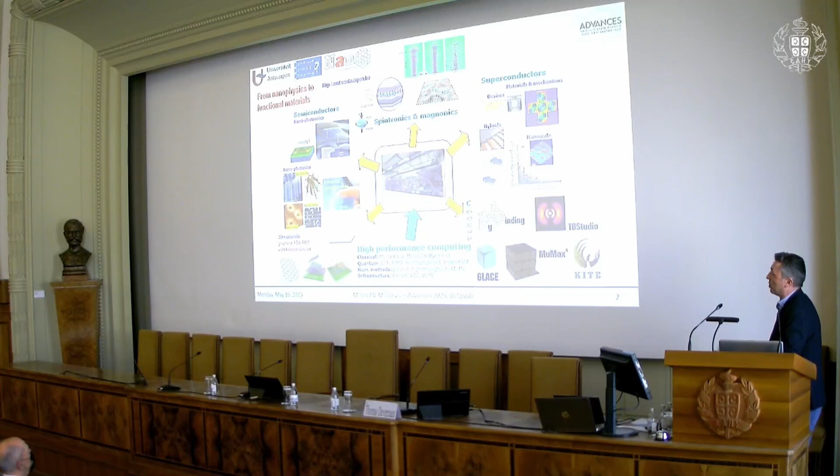Multi-scale theoretical modeling is a common denominator, whether for bulk materials, hybrid heterostructures, two-dimensional materials, and so on. Also common is high-performance computing—we develop codes and algorithms for addressing these challenging problems in material science, most of which are available to the scientific community.

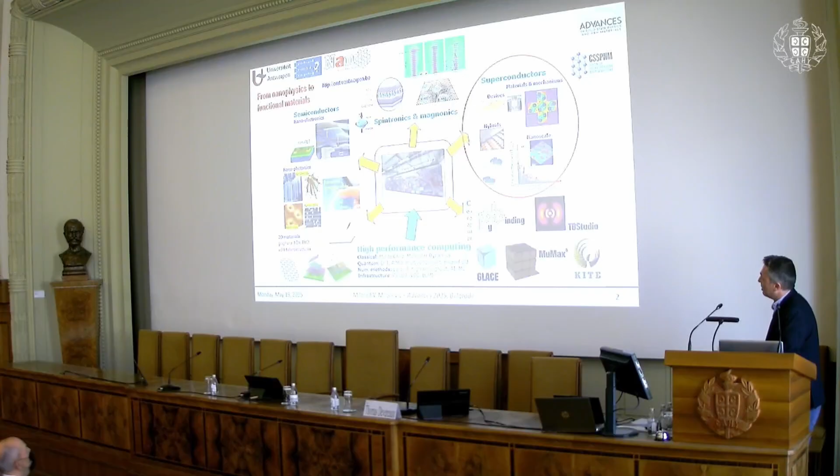Today I will talk about superconductivity, because that's where we had the most interaction with the center in Belgrade. Superconductivity for us is a long-standing topic, about 20 years, but we started from fluxonics and devices based on vortex matter, understanding their behavior in applied magnetic field and applied current.

We extended that to three-dimensional architectures, type 1 superconductors—most elemental superconductors being type 1—where the challenge is to correctly calculate and address the long-range magnetic fields coming out of the superconductor. Then Josephson physics: the Josephson junctions and Josephson phenomena between superconductors using various models.

Going to the nanoscale, below the characteristic length scales of superconductivity, when we confine electrons and Cooper pairs truly at the nanoscale, what are the emergent phenomena there?

Unconventional hybrids, not unconventional superconductivity—superconductor ferromagnet hybrids, antagonistic phenomena in solid-state physics, or graphene-based and 2D materials-based junctions. Semiconductor superconductor hybrids relevant to Majorana physics and, for example, the Microsoft path chosen for qubits. And finally, atomistic simulations, meaning the origins of superconductivity at the atomistic scale.

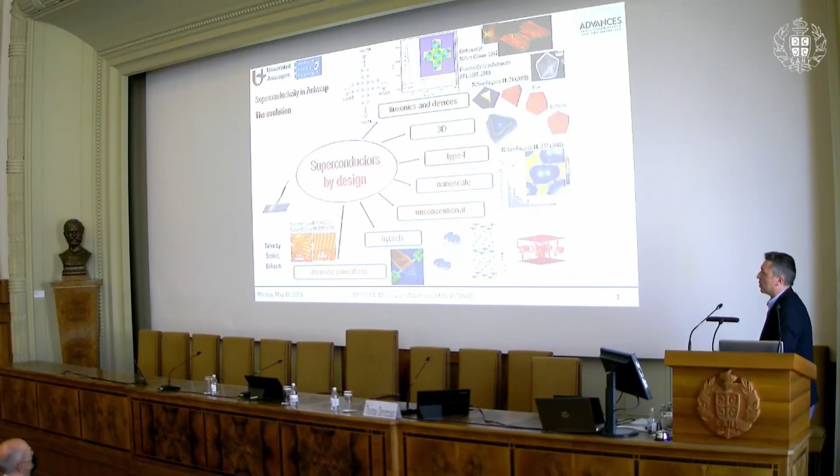I chose a topic that should be interesting and entertaining to most of you. Why is superconducting electronics interesting? Well, for one, it's low dissipation—that's clear from the superconducting properties. But it's also low noise, low loss, extremely nonlinear, high resolution, very high sensitivity type of electronics.

What is the drawback? It's the cooling, obviously, that one has to do to reach the superconducting state. But everything else is a plus.

So one commercial device that is widely available is a superconducting single photon detector. It's nothing else but a superconducting wire that is meandering and covering as much space as possible—this is about 10 micron by 10 micron.

If we measure the current voltage characteristics, we are in the superconducting state below the critical current: 0 voltage, 0 resistance. If we operate our nanowire just below the critical current, when a photon impacts any part of the nanowire, it will locally suppress superconductivity, and we will have some resistance—this is what we call a resistive state.

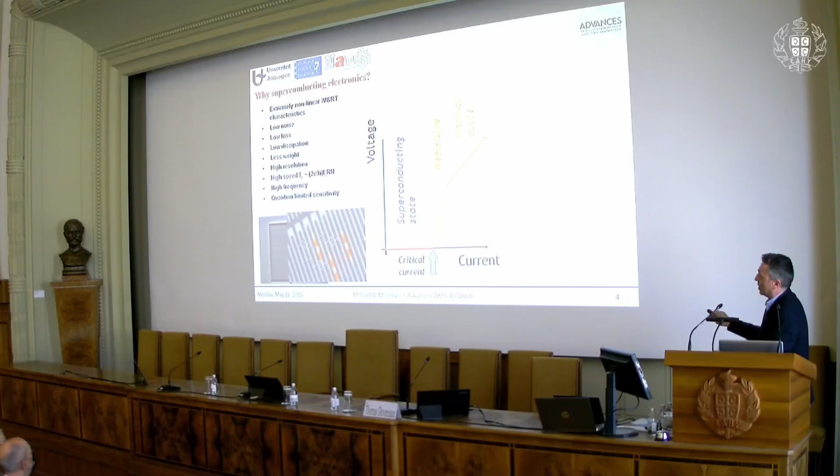If you keep pushing the current up, you reach the normal state. But we are going to have an onset of a voltage pulse, and if we then shunt this nanowire single photon detector with another resistor, with resistance lower than that of the resistive state, the current will go that way, superconductivity will recover, and our detector will be ready to detect the next incoming photon. That's the basic idea.

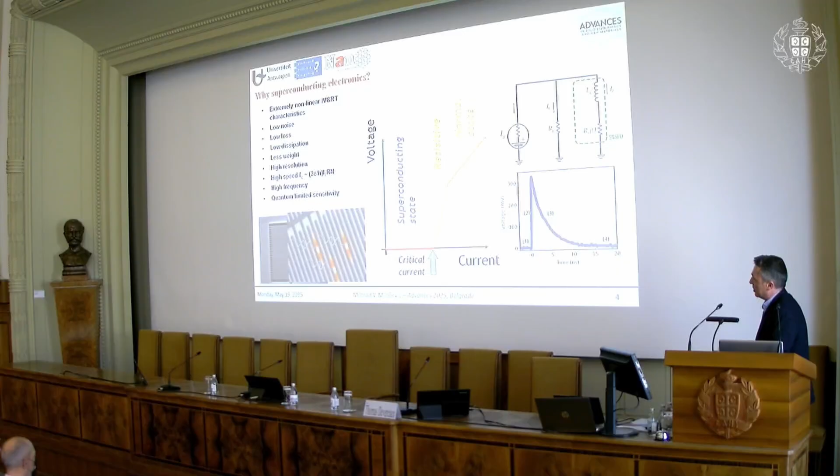I show this because I will need it a little bit later for the other devices I'll be discussing. Next to this, which is fully commercially available, there are also SQUID detectors, magnetoencephalography.

Any better equipped hospital will have this scan of the magnetic field of your brain based on SQUIDs and Josephson junctions. Josephson junctions are the base of a large set of electronics that's readily available, like this random access memory from the Lincoln Lab at MIT with a record-breaking 4 million Josephson junctions per square centimeter, actually based on 3D electronics, on multi-layer niobium structures. Josephson junctions are realized here by proximity of the two layers.

Or superconducting diodes that are up and coming. I will not spend too much time on that because I'm sure Mazhar Ali will discuss that a few days from now. But the idea is that you break the inversion symmetry of your superconductor one way or another, so that for one polarity of the applied current you have superconducting state, but for the opposite polarity you have normal state resistance. So in one case you have no resistance, in the other case you have maximal normal state resistance. These are things that are very well developed.

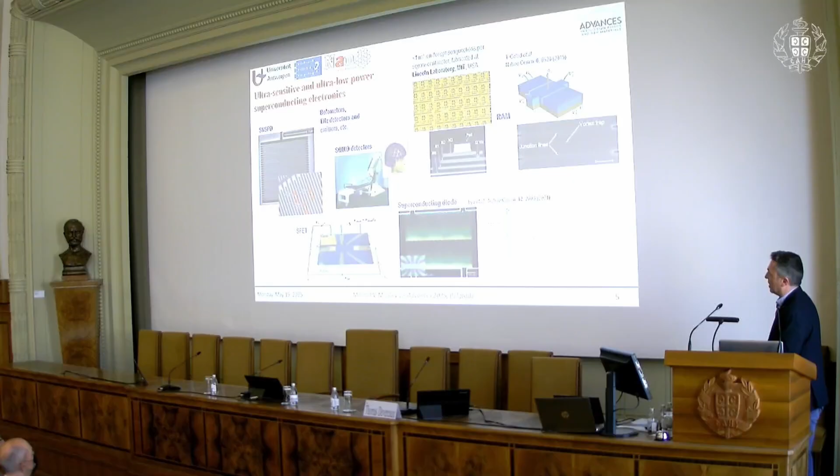Also, why is this interesting? Because of the second quantum revolution, qubits, all qubits that we hear about these days by big companies, IBM, Microsoft, Google, are based on superconductors one way or another. Why is that? Because we are able to fabricate superconductors with high chip density and control or read out both input and output in more ways than one. So these are not the best qubits in terms of coherence or other properties, but are best for technology. That's why there is heavy investment in superconducting electronics as well.

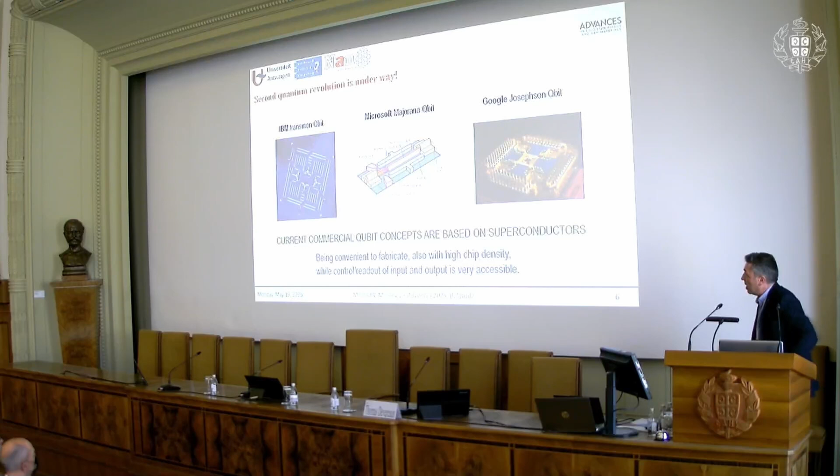So last but not least, I want to draw your attention to the rise of energy demand. Computing, data processing, machine learning, and artificial intelligence, ChatGPT, the clusters and servers of Google and Microsoft are eating up enormous amounts of energy, and individually they consume more energy than half of the countries in the world, more than 100 countries. Serbia is a bit higher on the list, but nevertheless consumes less annually than Google and Microsoft together. So there is a need for superconducting electronics. It's more appealing than ever. The cost of cooling is nothing compared to the gain for these computations at the exascale.

Superconducting single photon detectors we have, superconducting diodes we understand. I will not spend time on those, but I will talk a bit about superconducting field effect transistors and artificial neural networks as the next step.

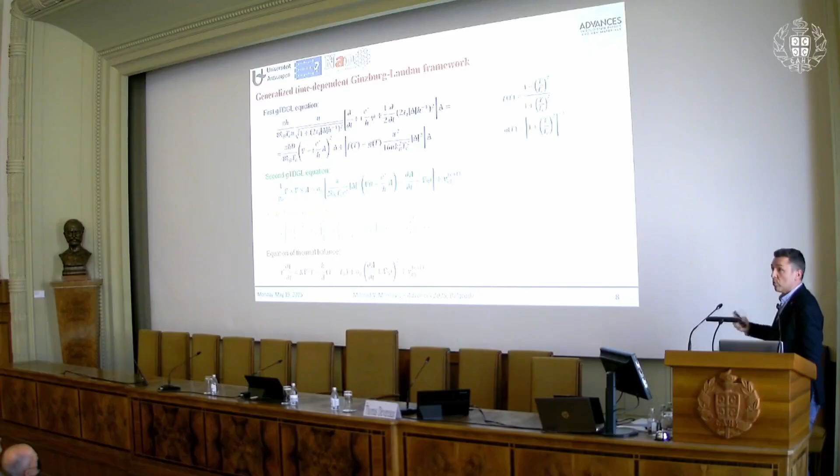These temperature dependencies here, Ginzburg-Landau theory is derived very close to the critical temperature. Strictly speaking, it is valid only at the critical temperature, but in comparison to experiment and following some empirical expressions proposed by Ginzburg many years ago, this actually is proven to work at very low temperatures, far from TC.

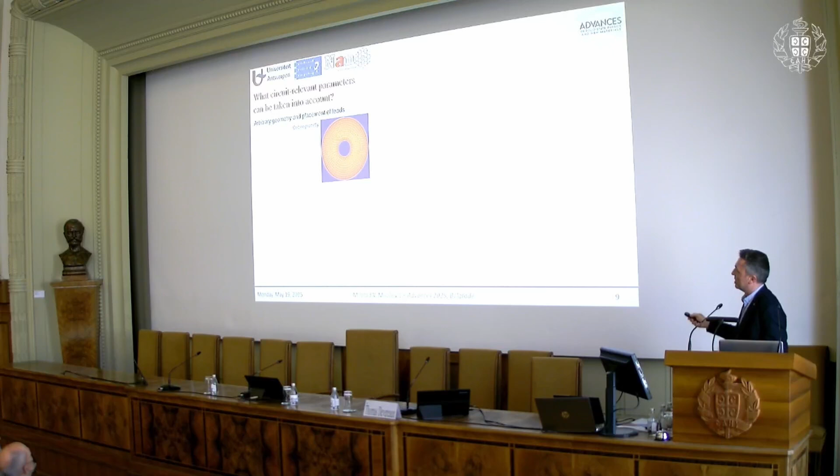In these simulations, we can take arbitrary geometry of the circuit. We can place leads. This is a Corbino geometry, so I'm putting current in here, taking current out there, and I'm monitoring how vortices are moving. You see that works, and that the vortex velocity changes radially as the current changes radially.

We can model single photon detectors. Here, for example, at Karlsruhe Institute of Technology, they were wondering about the effect of edge quality of nanowires on the performance of these single photon detectors.

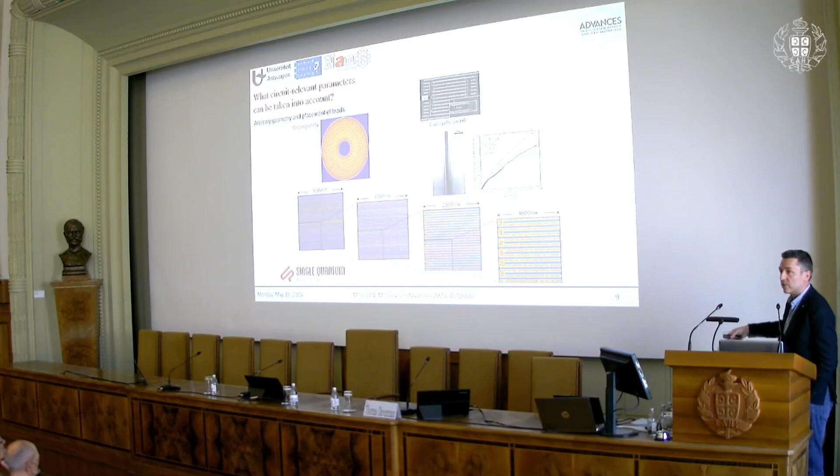So we did that, and we are able to do that at large scale. This is a commercial scale example from the single quantum company in Delft: an 8 micron by 8 micron single photon meandering nanowire that I just showed. We can do that with a resolution of 1 nanometer spatial resolution. So it's all working fine now.

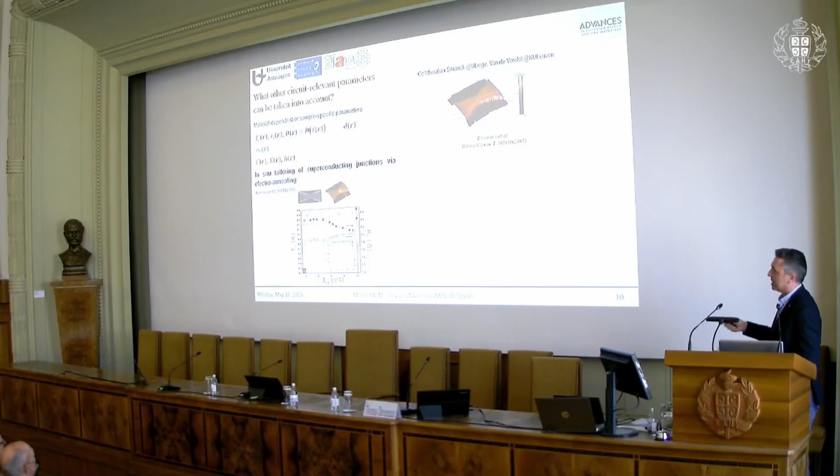We can also put spatially dependent parameters, be it inelastic scattering, mean free path, the heat balance equation, normal state conductivity, thickness—all of that can be done with 1 nanometer resolution. This was proven in previous papers.

So we take from experiment directly the shape and all the properties that experiment can give us. For example, here TC was varying from one place to another, mean free path was varying from one place to another, and we put that into the simulation without any fitting parameters.

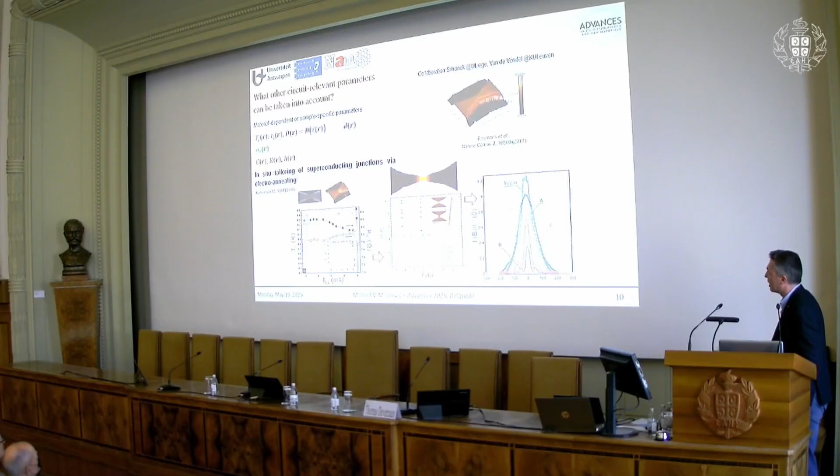And it seems to work. Okay, so now I'm coming to the base of all the technology that I'm going to talk about: a plain superconducting stripe. It's as simple as it can be.

So we have a superconducting nanowire. This is a typical 4-probe measurement: current is applied here, and voltage is measured here. What do you get then? You get exactly this type of current-voltage characteristic: superconducting state up to some critical current, then a resistive state, and then normal state. This is ohmic resistance right here.

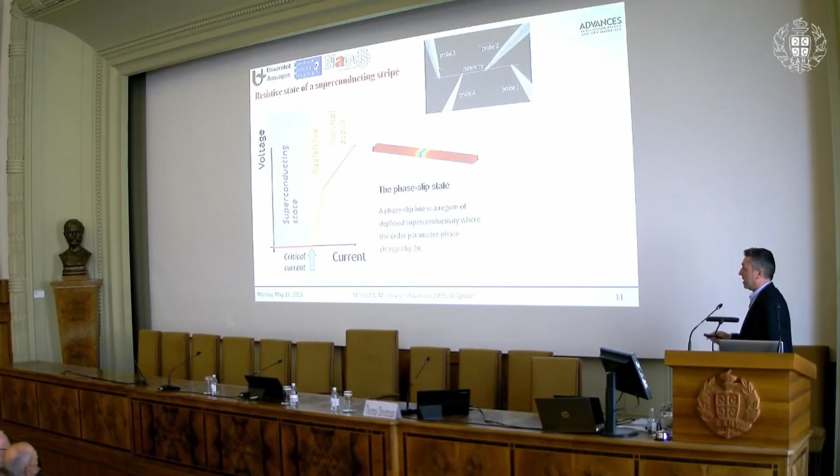So what is this resistive state? There are two possibilities. One is a so-called phase slip, meaning there will be a thin region, about a coherence length wide, of suppressed superconductivity, where the phase of the order parameter from one side to the other changes by 2 pi. That's why it's called a phase slip.

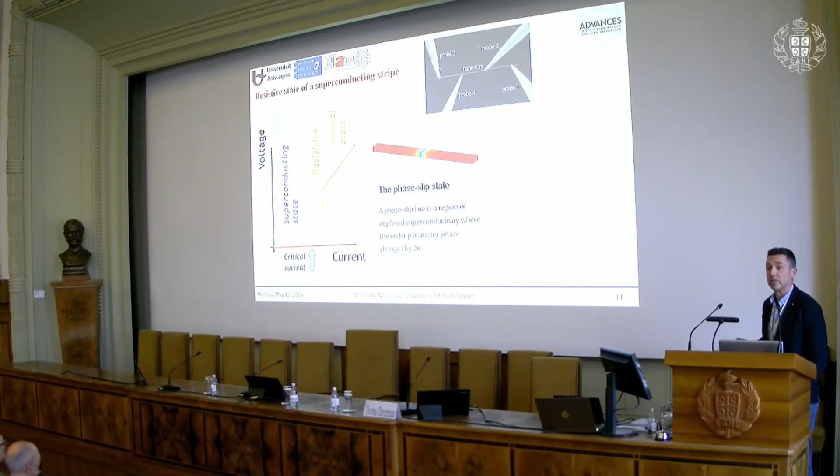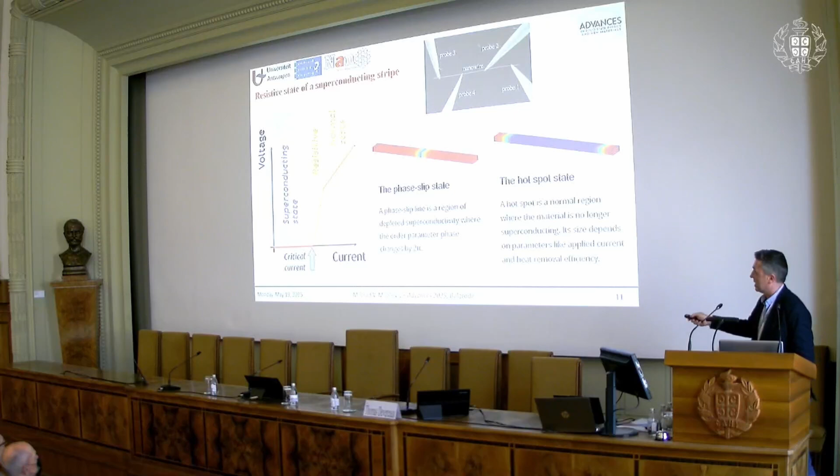Another possibility is the hotspot state. It's a similar dynamic, but this normal state heats up the superconductor, and we get a larger region where superconductivity is destroyed. From resistivity alone you cannot tell which one it is, but from the dependence of resistivity on temperature, you can experimentally determine which one you have. These are the resistive states I'll be talking about in the rest of my talk.

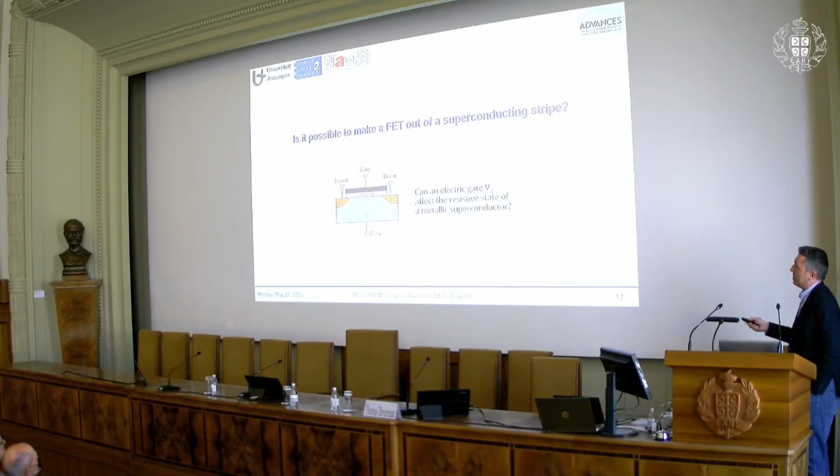And that's all. So now, field effect transistors—is it possible? It's the base of electronics, right? Can we have a superconducting field effect transistor with minimal dissipation? In order to have that, we need the effect of a gate on the resistive state of a metallic superconductor. As a physicist, you'd imagine this is not possible due to screening, right?

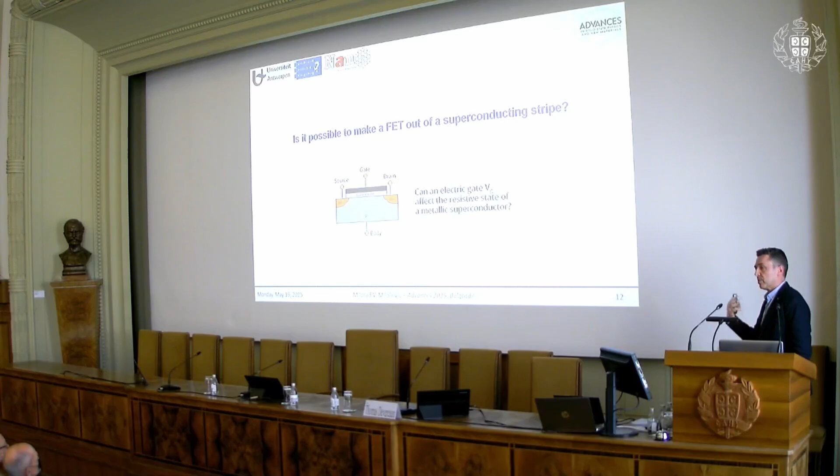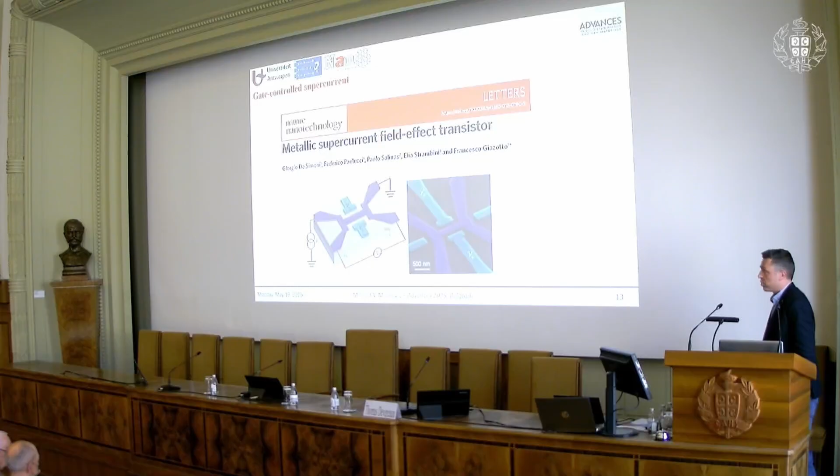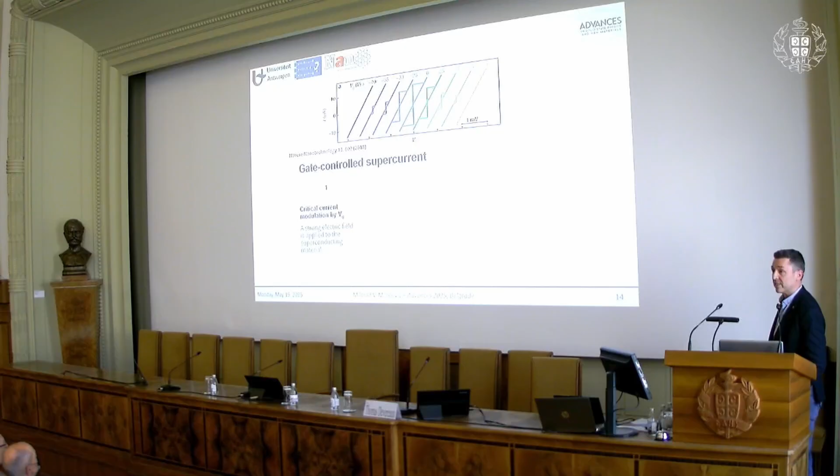So let's see. A couple of years ago, there was an experiment with a superconducting wire made of aluminum and titanium, gated from the side. This was about a couple hundred nanometers wide—you see it here, 300 nanometers wide—and the gating was applied from the side. Intuition tells us that nothing should change in the superconductor. However, they measured IV characteristics and saw that they depend on the applied gate voltage, shown right here. So there is a strong effect of a gate on a superconductor, in fact.

It is temperature dependent, so this is the critical current, the onset of resistance, as a function of gate voltage, and you see it is temperature dependent. There's a flat region up to which there is no effect of the gate, and then beyond some critical gate voltage, there is suppression of the critical current. It's a bipolar effect, perfectly symmetric with respect to positive and negative gating.

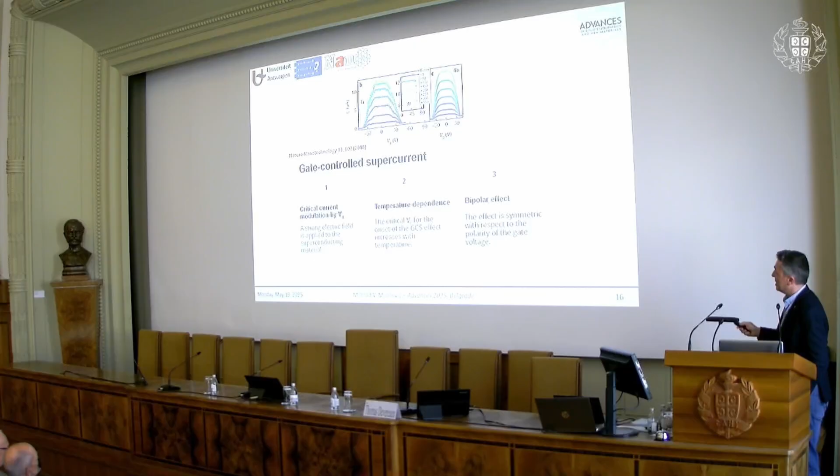But there is a problem: these gate voltages are very large, on the order of tens of volts. Why is that a problem? Because in order to integrate this with existing CMOS electronics, we have to get these gate voltages below 5 volts.

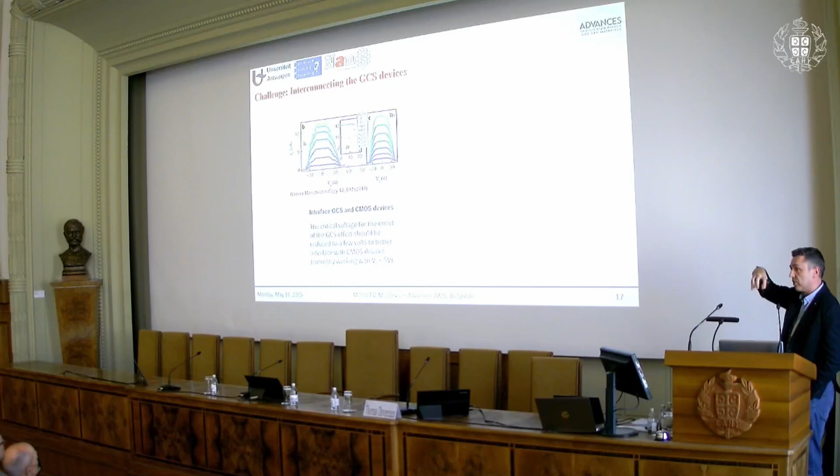But more importantly, we need to be able to connect transistors in series. For synchronization, we need to use the output voltage of one transistor as the gate voltage of the other. That is far away from what we need, because the input voltage is, let's say, 30 to 40 volts, while the output voltage is on the millivolt scale. So we are far off.

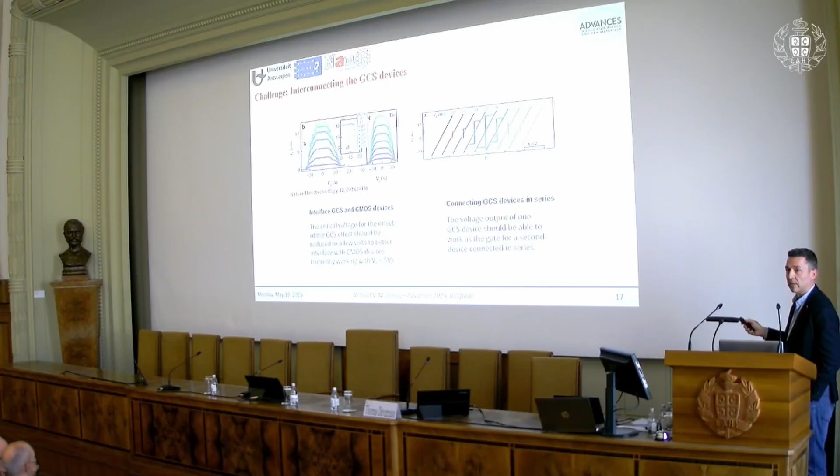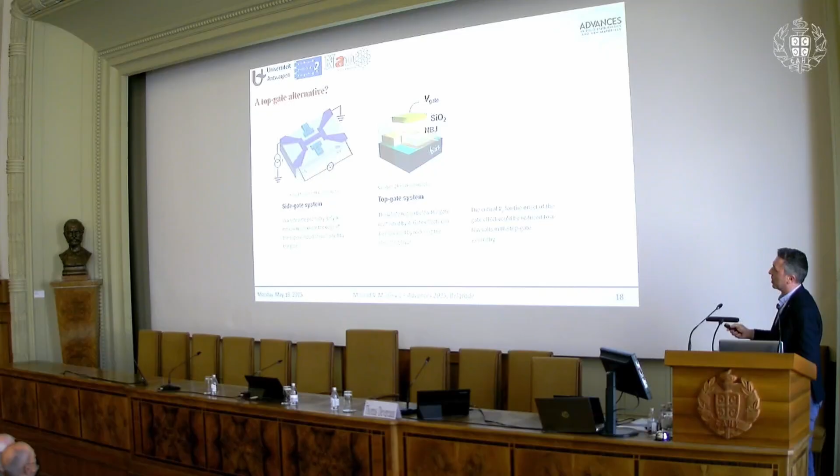So we thought this side gate system is not the optimal choice, especially not if the superconductor is thin. So we said we should look at an out-of-plane top gate system, to expose the entire stripe to the gate voltage, optimize the thickness of the oxide—this will turn out to be very important—and also optimize the width of the nanowire that is used here.

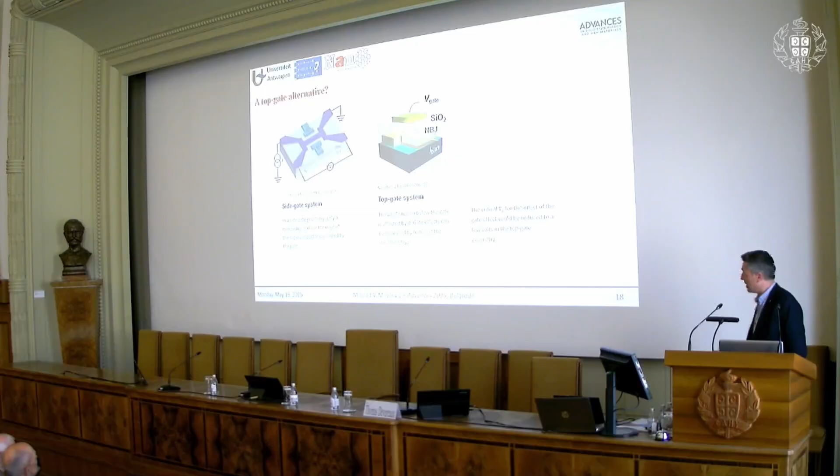So when you have an idea like that, you talk to an experimentalist, and preferably you need an experimentalist with deep pockets. Some people go to China, we went to Saudi Arabia—King Fahd University of Petroleum and Minerals, maybe not so well-known, but actually standing very high in the QS international ranking. They have a very nice pulsed current system and transport measurement, and this is the system that we designed: a niobium titanium superconducting stripe of width 3, 5, or 10 microns, significantly larger than the previous one.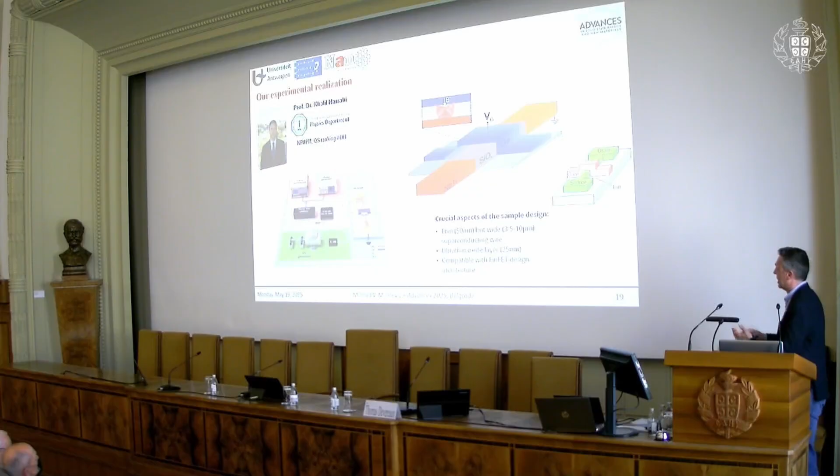Thin, 50 nanometers thin, so that we have uniform gating across. Ultra-thin oxide layer, 2.5 nanometers, and then gate coming all around. This is the so-called FinFET design architecture. So we are sure that we have gating from all sides of the stripe.

So this is the result. We have, as a function of temperature, the strong effect of gating on the critical current, and we have a reduction of the operating gate voltage to below a volt. It used to be tens of volts.

Then we have asymmetry. It's no longer symmetric, but asymmetric. I don't know if it's very clear, but it's not bipolar. Then the onset, the critical value for the onset of the effect, is depending on temperature. And this critical VG is depending on temperature. So these are all features that are different from the previous side-gated system.

This is important because it helps us identify the mechanism for the gate effect. The previous one was never understood—it was just called the field effect, whatever it may be. We don't have a direct field effect, because otherwise we wouldn't have asymmetry between different polarities of the field. So we eliminated that.

Direct emission of high density carriers from the gate directly to the superconductor is not possible, because our oxide thickness is still sufficiently thick. Phase fluctuations probably play a role, but not at all temperatures that we considered. So finally, we realized that it's only the phonon heating in the oxide that is important for this effect.

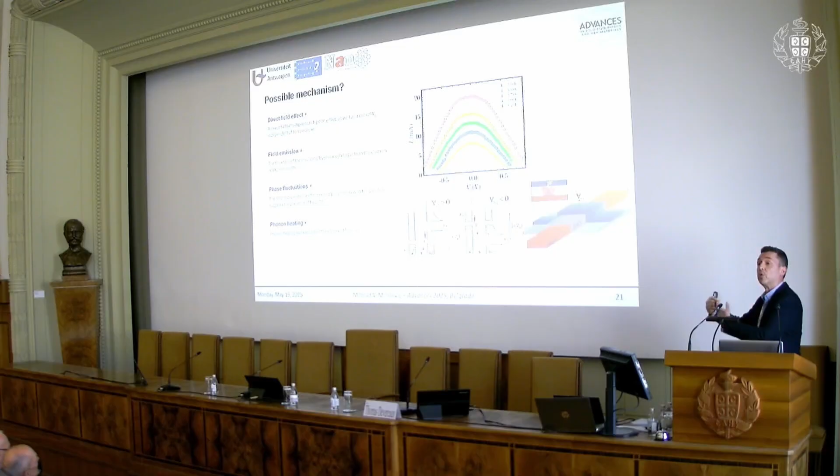So with that in mind, we go to theory, and Leonardo came up from a microscopic derivation with the temperature change term in the Ginzburg-Landau equation, of this shape that depends on the gate voltage and has a temperature-independent factor B that can be used for all stripes regardless of their width, and a temperature-dependent term that determines the effective heating in the superconductor.

And using the same A and B for all of the temperatures here, we get a nearly perfect description of the experiment, using the whole theory simulations that I've just shown. So this is really a major step forward.

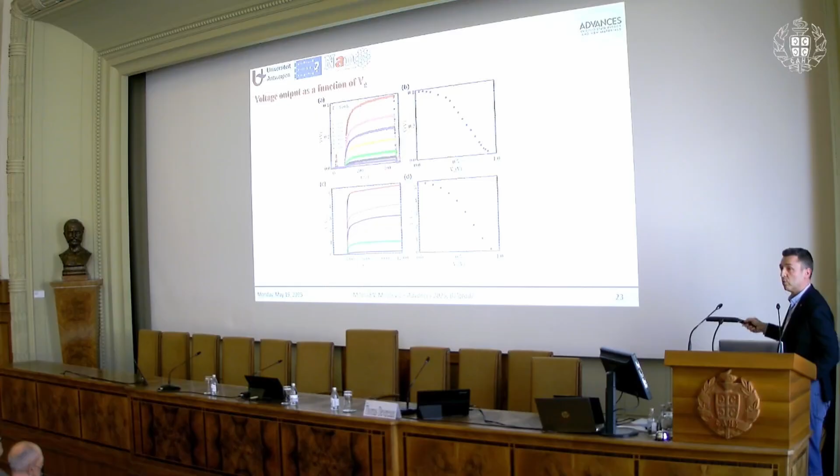Why? Because in addition to it working, we can now connect two transistors in series, because our output voltage is, let's say, up to 0.4 volts in this case. This is experiment, this is theory, and the input voltage is on the same scale, and can of course be further tuned if we really want to do that. So I think field effect transistors, superconducting ones, are nearly there.

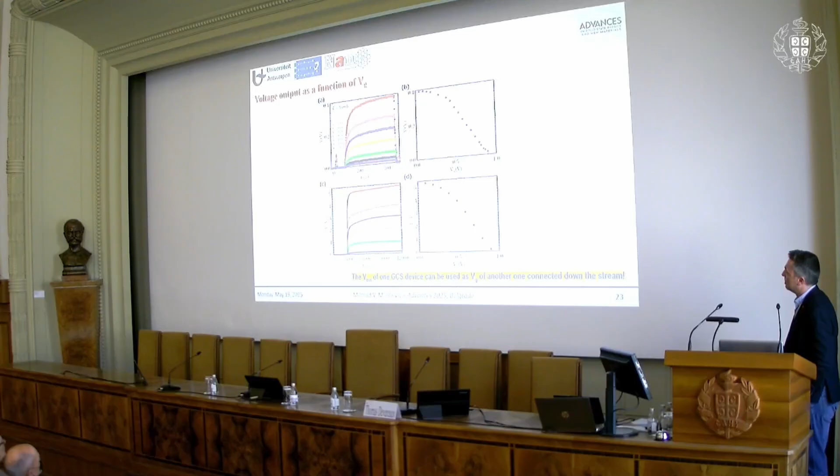Now, the second example I want to discuss in the short time that I have is artificial neurons. We want to mimic the performance of a biological neuron by hardware. This is something that has been done with CMOS technology—there are commercial realizations of it, Neurogrid, True North, Loihi—and this is the energy consumption per spike. Each neuron, as you'll remember, generates a spike as a response to excitation.

And here I will show the same superconducting stripe that I just used for gating. I will use it for a different purpose, as an artificial superconducting neuron. And the energy consumption will be the lowest of all the energy consumptions of all the products on the market.

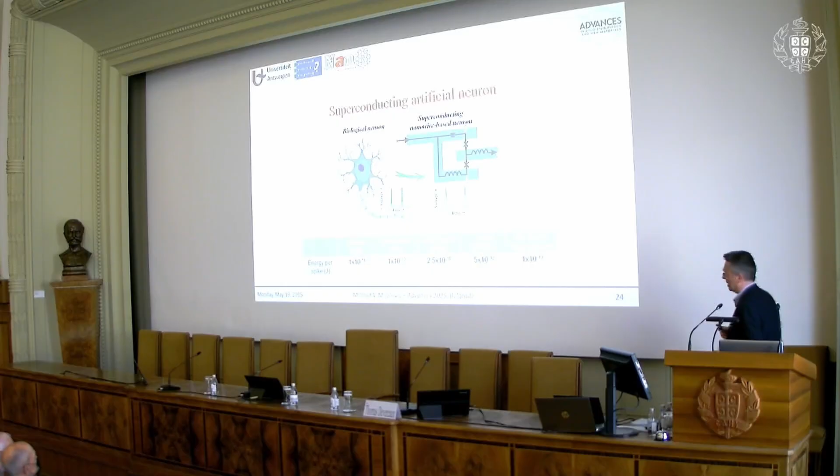Now, this is the biological neuron. You will know that you have depolarization and repolarization effects, basically a voltage spike caused by opening sodium and potassium channels in the cell.

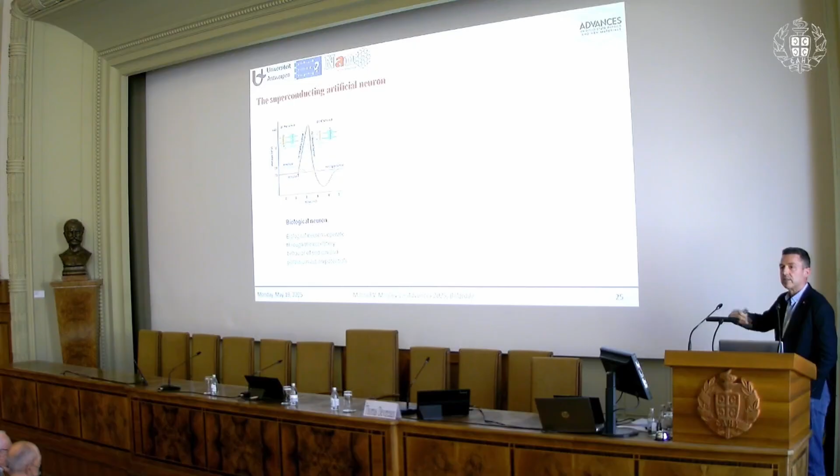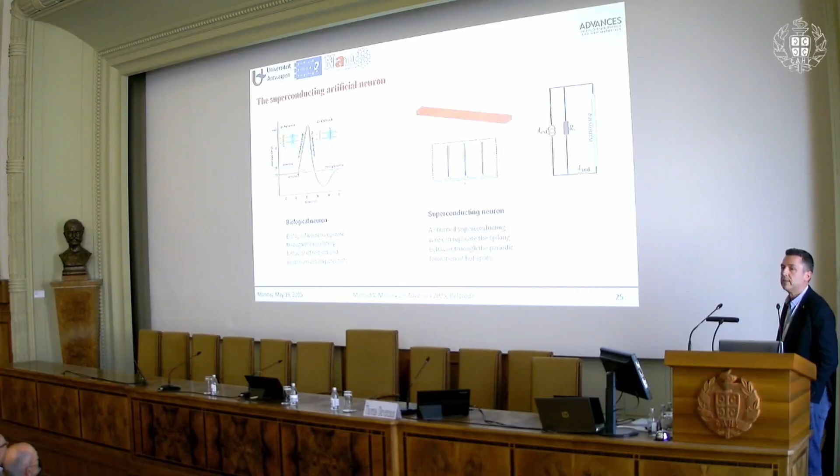What we are proposing now is to look at the resistive state of a superconducting stripe. If we apply current and measure the response as a function of time, we will get a hotspot for sufficiently large current, putting it in the resistive state. If I then shunt this nanowire, I get a reduction, then again the rise of the peak and reduction, and so on. This rise and fall time is determined by the electronics, by the shunt resistor and the inductance of the circuit. This is the physics of a superconducting stripe under applied current—quite simple.

So what is the analogy to regular neurons? First, you need a threshold response—the neuron only fires if excitation exceeds a certain value. We have that: the current exceeding the critical current. Refractory period is a critical time below which two signals cannot be distinguished—if you apply a pulse of current and another pulse, there's a critical time in between below which the superconducting neuron can't react and give you a voltage spike, similar to a real neuron. Then there's class 1 or 2 behavior: if I increase the excitation, does the frequency of spikes increase? In superconductors, it will—so it's a type 1 neuron, the frequency increases.

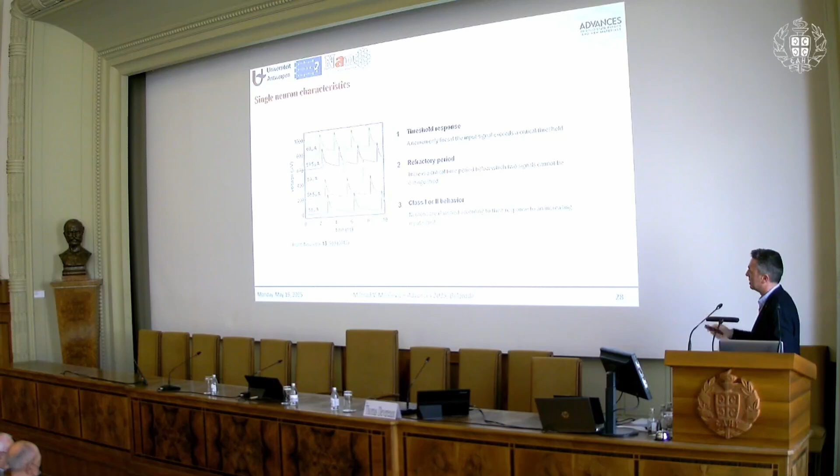So we did the experimental voltage output, shown here as a function of applied current. We are just above the critical current and increasing it further. What you see is that in a fixed time window—the current pulse is 400 nanoseconds—you see one spike, then 2, 3, 4, with the number of spikes increasing.

It's on a similar time scale, though it will depend on the type of neuron, since there are many different kinds. I didn't look at that specifically, but I suppose it can be engineered. Basically the frequency, as you see here, increases with applied current, increasing by a factor of 3, maybe an order of magnitude. As a function of temperature we can have a dependence, and the characteristic rise and fall times can be controlled by the electronics.

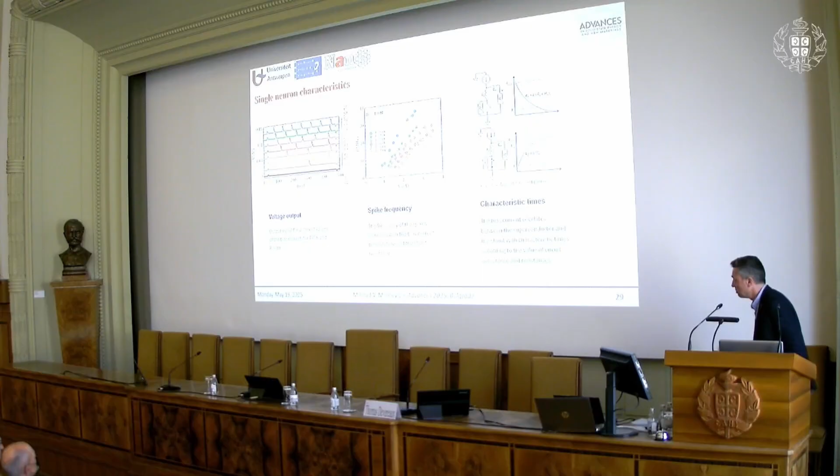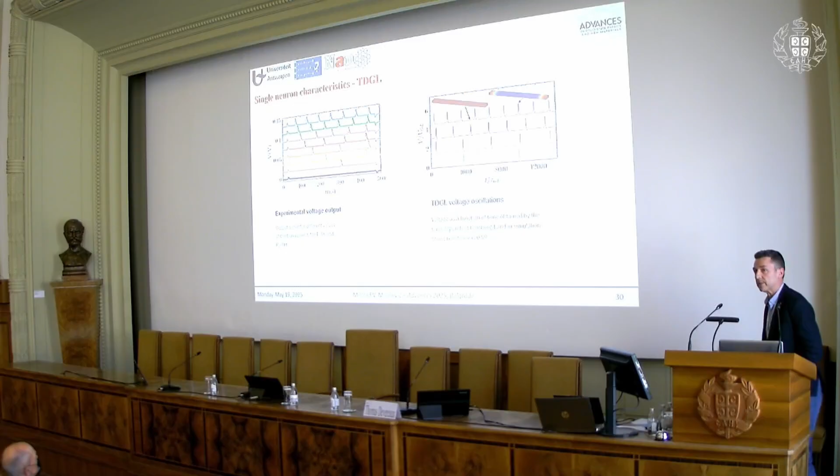Theoretically, we did simulations and got the exact same thing: the hotspot generated, then recovered, generated, recovered, and as we increase the current we see exactly the same behavior with a shunt resistance—there's a shunt resistor coupled to the nanowire of a particular value. This is important.

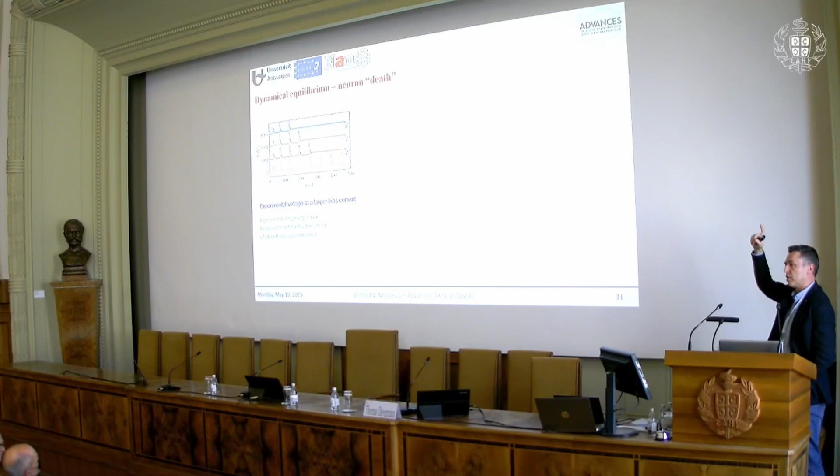The problem is if we try to crank up this frequency, at some point we run into trouble. This is the same measurement, just increasing the current further. Here I had fully occupied 400 nanoseconds of spikes, but then I start losing them, and this voltage level is higher than before. This is us killing the artificial neuron. Instead of bouncing between the hotspot and the superconducting state, the system prefers to go into the phase slip state and remains permanently there. In simulations, the voltage versus time goes up and down—hotspot, hotspot—and then finally just remains in this phase slip state all the time. That's not what we want for the neuron.

So we have to stay within a range of currents where we can fully control this spiking behavior. This range of currents and the frequency of spikes will depend on the shunt resistor as well as the properties of the superconducting stripe.

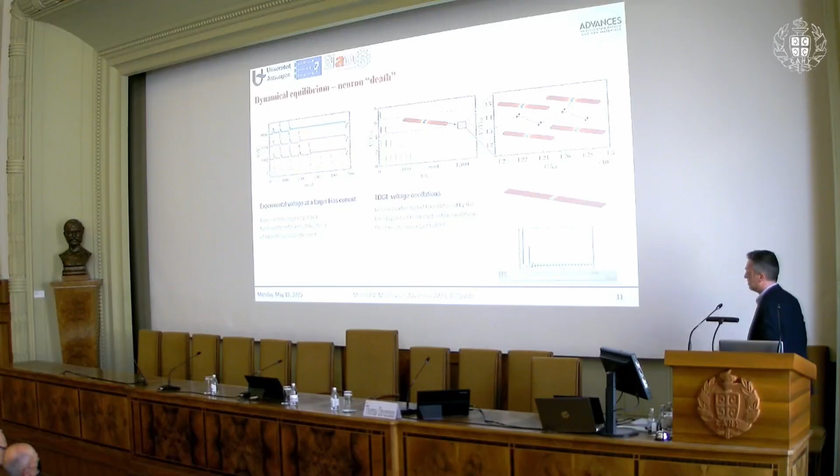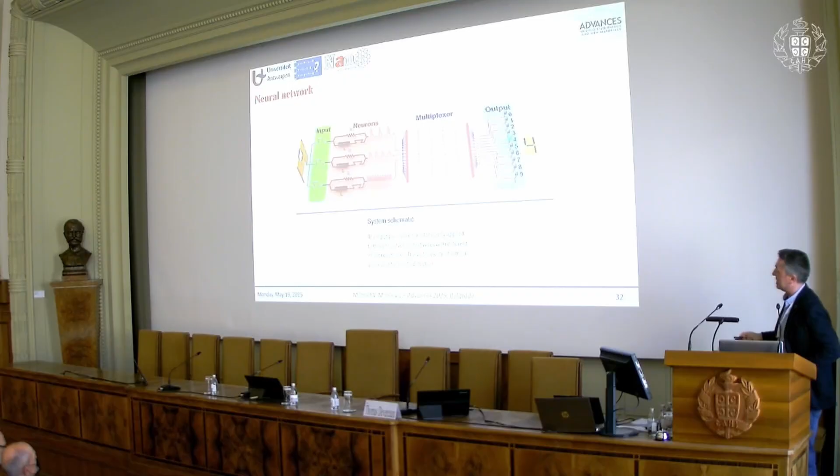Now we decided to make a neural network—I'll speed through, I only have 2 slides left. Basically we use the same stripe but shunted with different resistors. Taking the same stripe shown before with 3 different resistors—in some theoretical units, let's say about 1 ohm, 2 ohm, 3 ohm—we get different spike frequencies in the same time period for the same applied current.

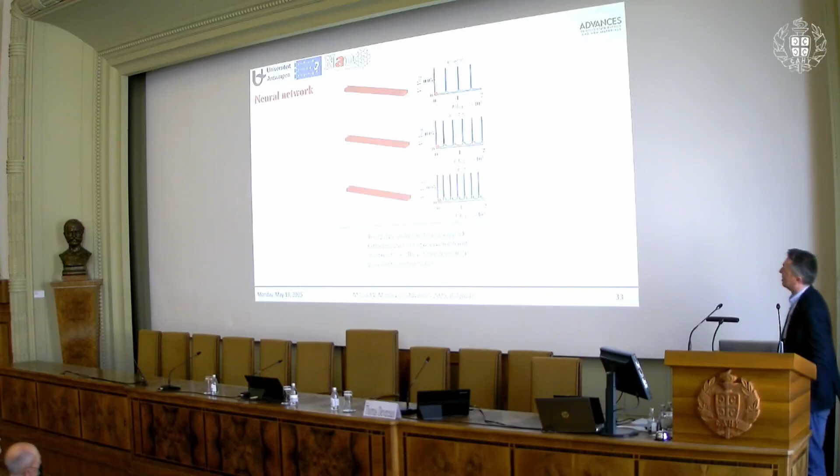Now what I do—I'll skip this—I take an image. In this case it was a simple 3x3 image, an image of the number 4.

Here we should have, let's say, value 1, and here we should have 0. This 1 is the value just above the critical current, and 0 is the value below the critical current.

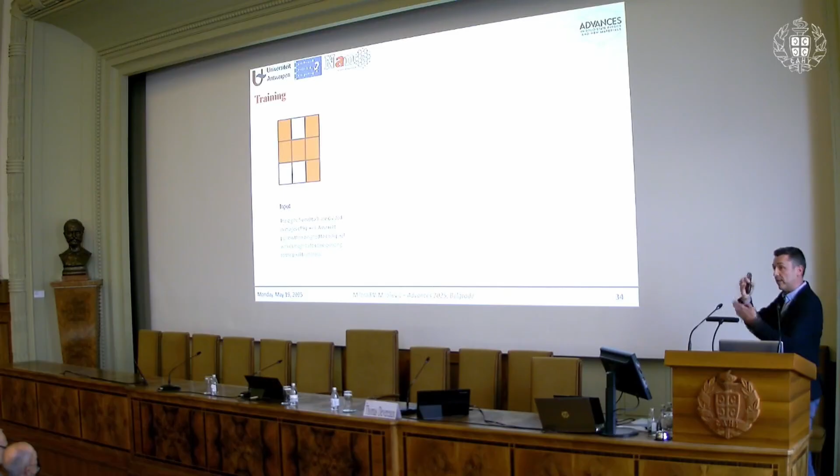Of applied current, I apply a sequence of current values, 1 through 9, in sequence to each of the neurons, and I get a sequence of voltage versus time signals of the 3 neurons in this example. Then we use software, based on the cross-entropy loss function method, to optimize the weights of the 3 neurons so that this image is correctly recognized.

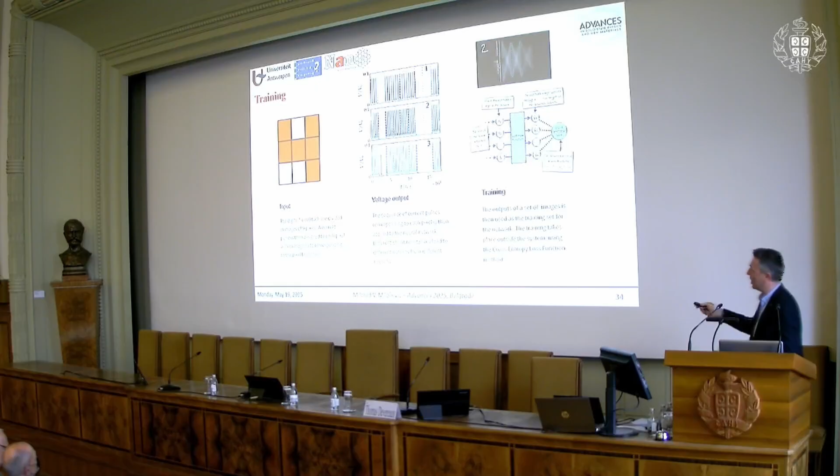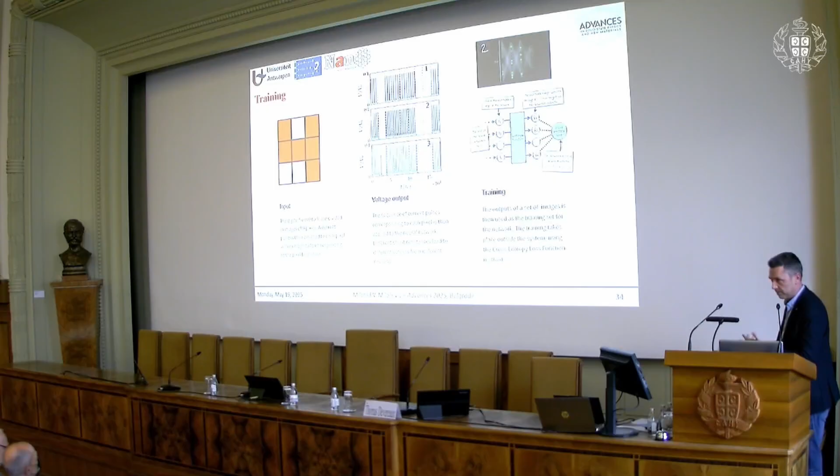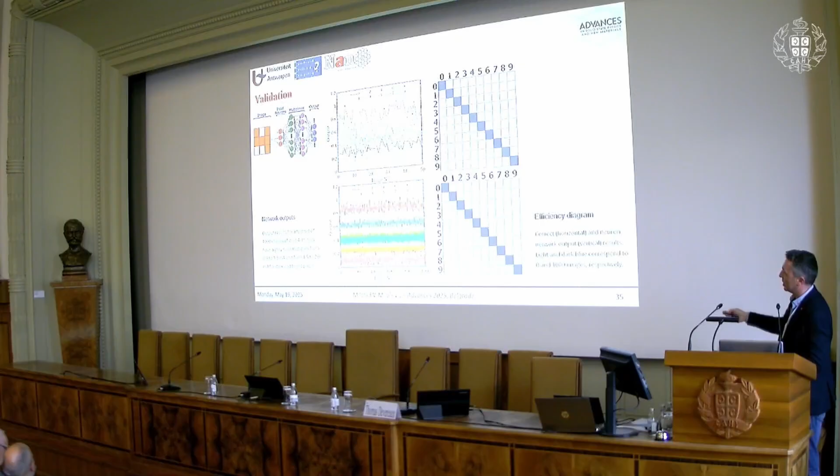And we do that for thousands of images, allowing values like 1, 0.9, 0.8, 0.7 and 0, 0.1, 0.2, 0.3 to account for error from the grayscale in the image. So after training, this is the result. The idea is that when we apply, say, number 4, in theory and experiment, sending through 1,000 images of number 4 with different grayscale, the output signal for number 4 should always be the highest. Not all of them will be correct, but the highest frequency one will be the correct one, and actually this works really nearly ideal.

So I see the chair rising. I hope to have convinced you that we already have single photon detectors fully functional, diodes are almost there, and a field effect transistor. I have a simple proposal for an artificial neural network that works. There's a whole topic I hope to share with you soon about two-dimensional van der Waals superconducting electronics, pushed forward by fantastic advances, again in China, on wafer-scale grown superconducting 2D materials that can be set up in Josephson junction architectures. And there's more to come in quantum communication, cryptography, and so on. So allow me to thank my collaborators on this work one more time, and thank you all for your attention.

So I'm not sure what you mean, but our input is not DC. It's a pulsed current with a length of, let's say, 400 nanoseconds in this case. So it's in principle time-dependent input and time-dependent output.